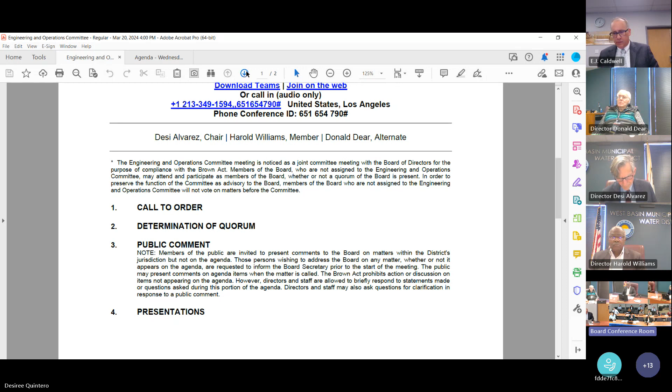The first item is the DCS replacement project. Would our general manager like to introduce that? Yes, thank you very much, Mr. Chairman. On the eve of March Madness, our engineering and operations team has brought their A game for these presentations. As mentioned, the first is item 6A, the DCS replacement project and the owner agent RFP. For this presentation, we have John Benner, our engineer 2.

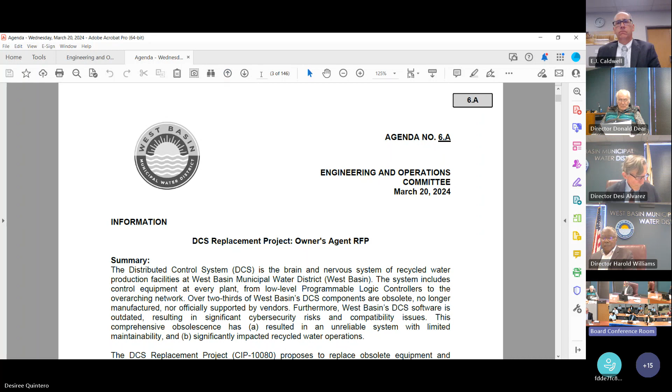Thanks, EJ. Good afternoon, Chairman, members of the board. I'm here today to present information item 6A on the distributed control system replacement project. This item begins on packet page 3, but we'll be starting today with the presentation on page 10. In this information item, we'll be discussing staff's intention to acquire an owner's agent, why it's necessary, and what their scope of work will entail. Next slide, please.

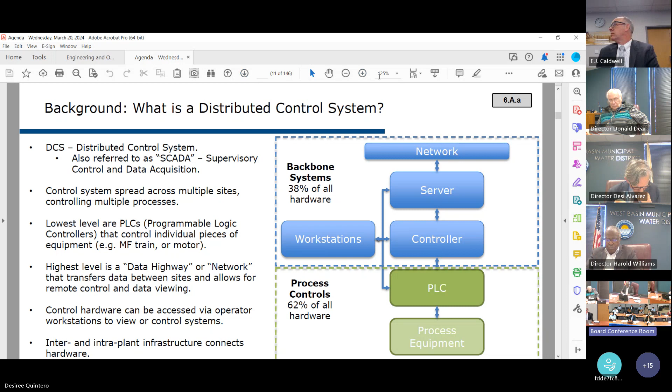First, I'd like to give a brief recap of our DCS system. As I mentioned last month in the project review, our distributed control system is effectively both the brain and nervous system of our recycled water production system. It controls every aspect of production, from the valves that allow the influent from Hyperion to the pumps that send treated water to our customers. At West Basin, we've split our system into the DCS system, with the backbone providing overall control and system management, and process controls such as PLCs managing individual components in the field. In terms of actual components, the split between process controls and backbone systems is roughly 60-40, although the backbone systems carry a much greater risk. Next one.

As I mentioned last month, approximately two-thirds of all our hardware is obsolete, meaning no longer manufactured or supported, with only limited technical support available in the market, if any. This is a problem when around 30% of that obsolete hardware has the potential to cause a full site shutdown. And since there are very few replacement parts on the market, a shutdown could last months. In the last 6 months, we've experienced 4 major DCS-related issues that have impacted production, and these issues appear to be occurring more and more frequently. We're also having issues integrating new systems, such as the JNM Phase 2 project, and these outdated systems present a significant cybersecurity risk, a threat which is unfortunately becoming more common in our industry. There's also a number of ancillary issues, but the bottom line is that our control system is obsolete, regularly failing, and it seems to be getting worse day by day. Therefore, staff is undertaking this project to replace the backbone system in its entirety, which we estimate will offset approximately 80% of our current risk for around one-third of the cost of full system replacement. Next slide, please.

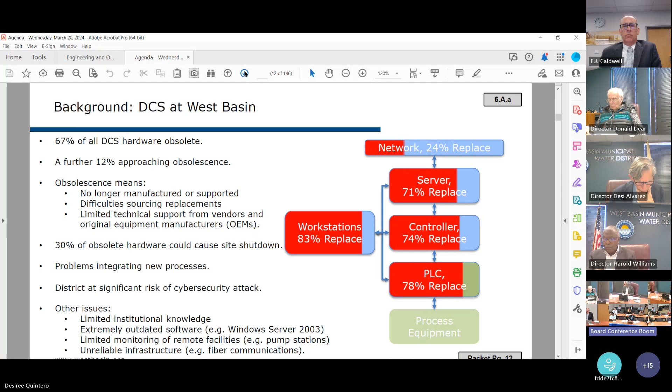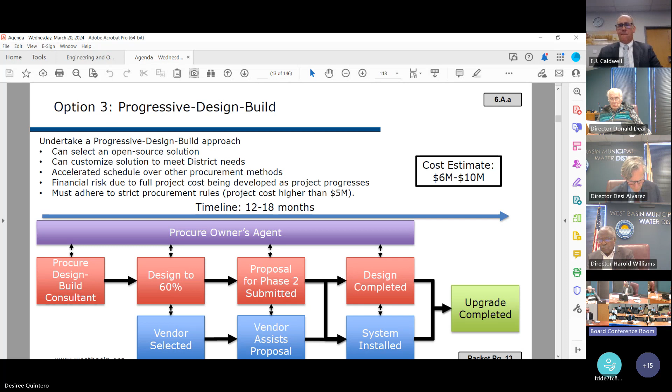As I presented last month, staff is recommending a progressive design build approach. This approach will allow us to assess the available control systems on the market, select the system that will serve the district for decades to come, and install it all within 2 years, while providing a single point of contact throughout to manage both the design and installation. It's estimated that this project will cost up to $10 million and take up to 18 months. One of the biggest risks with a design...

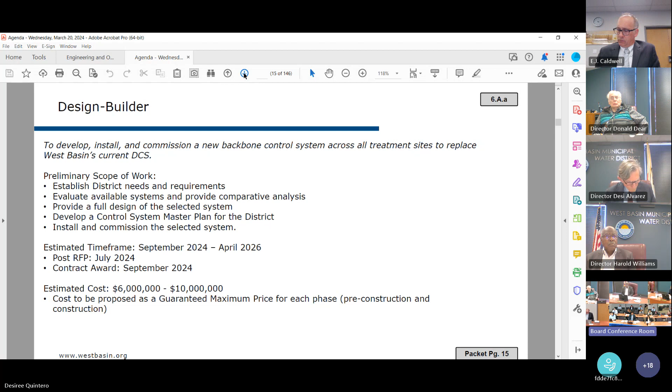Onto the penultimate slide, project finances. This is similar to last month, but as of January 1st, we spent a total of $814,831 on this project, that's since the project's inception in 2019. Just over half of that total was spent on the comprehensive audit.

The backbone refurbishment aims to resolve approximately 80% of our systems issues, leaving us to slowly replace the remaining systems as and when necessary over the next decade.

We have secured $822,743 in refinery funding to date. However, if the total project cost increases to around that $22 million, we would be able to request further refinery funding under our current agreements of up to $3.6 million.

These additional funds will be requested as the project costs become more concrete over the next few months.

In terms of this current fiscal year, we had allocated $1,200,786. However, as of January 1st, we've only spent around $37,000, all of which has been on staff labour.

We intend to use some of that remaining budget to onboard the owner's agent and also to purchase stopgap equipment to try and minimise risks over the next year. But most of the remaining $1.2 million will not be spent before July.

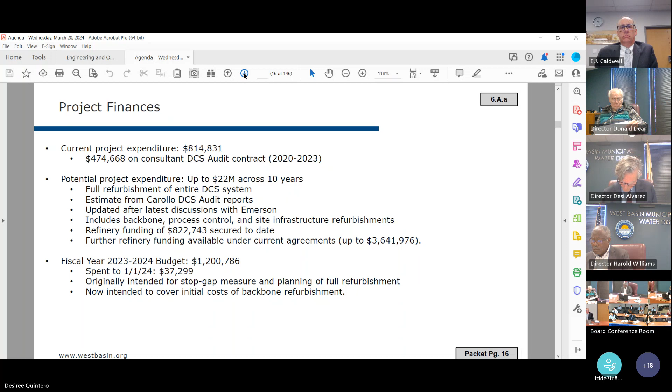And on to the last slide, our next steps. Staff intends to procure and onboard an owner's agent as soon as possible to assist with the procurement of design builder. We hope to have the owner's agent on board by the end of next quarter, with the design builder on board by the end of quarter 3.

Through the end of the year and into early next year, we intend to evaluate and select our preferred system, and then, if the guaranteed maximum price negotiations go well, install that system throughout the rest of 2025, with an intended project completion in early 2026.

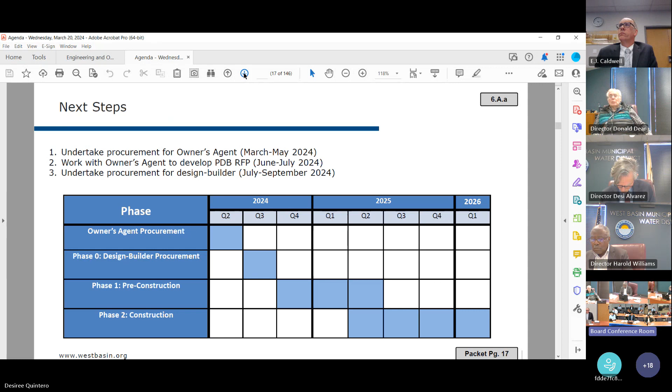Next slide. With that, my presentation is over. I'm happy to answer any questions.

Director Williams, any questions? Yeah, thank you. Yes.

This is a heavy duty project, right? So who, from our agency, is going to be the program manager, for lack of a better term, of the whole thing? You know, your project manager you have, right? Who's going to be the project manager? And who's going to be the manager over the project manager?

We're going to, Director Williams and Directors, have an all hands on deck approach for this particular project, because it's going to be led by engineering, and it's going to be led by John here, who has taken the project over for a while now. So he's going to act as project manager, but he's going to be supported by me and others in the engineering department, as well as several folks from the operations department as well. We're really hoping to have the legal expertise and the technical expertise that John talked about throughout the process, and we're confident that with the onboarding of the owner's agent, we're going to be able to have the right people see this project through. So program manager wise, it's going to be me and others in West Basin's leadership.

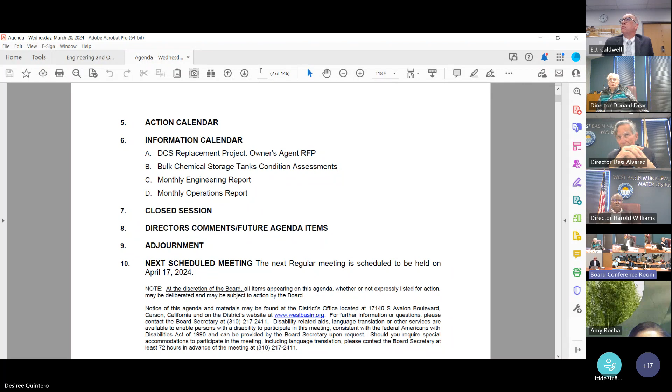It is something we considered. The consideration was that in order to save costs, we're going to need the owner's agent for the entire project, to be available for the entire project, to retain that information and that knowledge throughout. The idea was that if we have a separate construction manager, there'll be a point during construction where they're performing the same role, both of them reviewing and responding to RFIs and submittals. And so we're almost paying twice for some services.

May I add? We don't... okay, go ahead.

Director, in putting out the RFP for the owner's agents, we do give points for small business, local business, hoping that encourages not only the prime to be a small business but also a sub potentially being a small business. You just made the argument for efficiency, and bringing in a sub is not necessarily an efficient concept.

It seems like it would be better to split that out at CM and really target it. You'd have a much greater potential of people responding, and more specialized people saying 'I have that special expertise' without bringing in the baggage of a 5,000 employee firm. So it'd be much more responsive to the district's needs—two contracts, one for the CM and one for the owner's CM agent.

Issued at a later date, as you traditionally do at the time you're awarding construction. So when that design build RFP is really ready to go, you put it out and understand what you're going to get back at that time. Either you go back to the owner's agent and work out something, or they do the CM work if that's appropriate. And if we have a really good owner's agent, that agent's advice would be very beneficial in finding that.

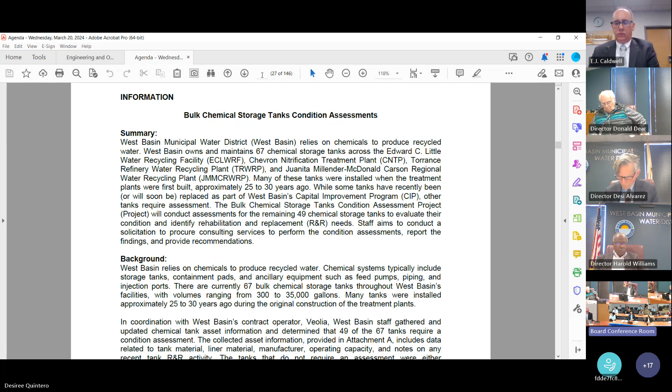So please follow me along to packet page 34. I will walk through the data that we have collected on these chemical bulk storage tanks, the preliminary prioritization that has been determined to perform an assessment, information we have gathered from other agencies regarding their bulk chemical storage maintenance activities, and the next steps for this project.

So on packet page 35, before we could begin scheduling a condition assessment for the chemical storage tanks, we worked with our contract operator to update our asset management information for all the bulk chemical storage tanks located at each of our facilities. That includes ECL, Chevron Nitrification Treatment Plant, Torrance Refinery, and the Carson Regional Water Recycling Plant.

This table shows the amount of data that we had to collect and verify, which included the tank manufacturer, the tank material, the liner material, and operating capacities. We had to assemble a significant amount of information for a more holistic understanding of when these tanks should be replaced. This exercise allowed our staff to identify if a tank is no longer in use, decommissioned, removed, or will be removed via a separate existing CIP project.

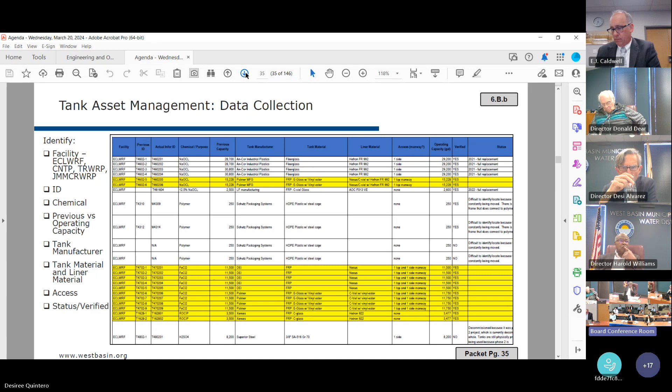On the next packet page 36, the table above shows that there are 67 bulk chemical storage tanks located across all of our facilities. Based on the information we collected, there are 49 tanks that require an assessment, with a correction that the Carson plant will actually need an assessment for 4 tanks instead of 6. The table below shows an idea of the varying sizes of each of these tanks.

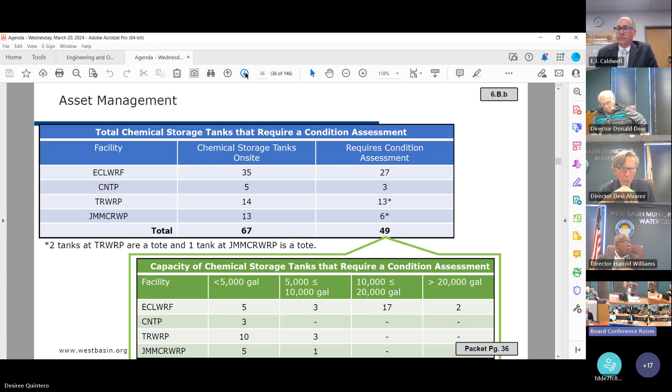Moving along to the next page, on this page and the next 3 pages, you'll see a visual representation of the prioritization of the bulk chemical storage tanks at each of the facilities. The highlighted green, yellow, and red show whether a temporary bypass is needed, or a shutdown is needed, to perform those condition assessments.

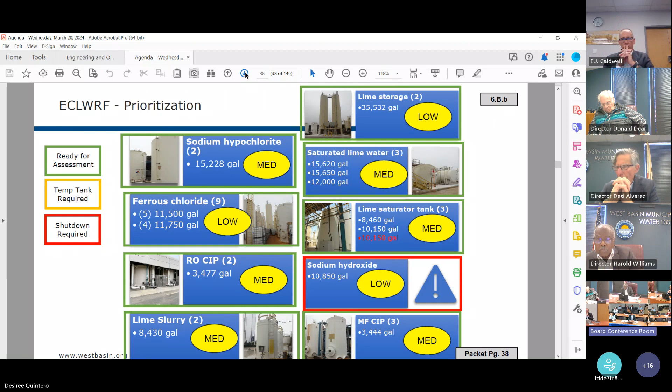You can see here at ECL, there are 27 tanks that need to be assessed. On the next packet page, this is Carson, and I do want to note that the MFCIP will be removed as part of the ongoing CIP project, so there are really only 4 tanks that need to be assessed at Carson's plant.

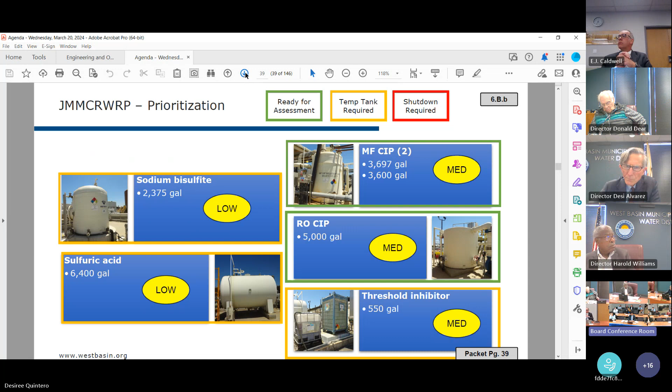The following page shows that at Torrance Refinery, there are 13 tanks that need to be assessed. And lastly, at Chevron Nitrification Treatment Plant, there are 3 tanks remaining that need to be assessed, with the other 2 tanks being currently replaced as part of a separate CIP project.

So on packet page 42, we wanted to perform our own due diligence, and we reached out to other agencies to understand their bulk chemical storage maintenance programs. I do want to note not all of the chemicals stored at each of the facilities, nor all the tank materials used, are on this table. This was simply the information that was provided when we talked to their personnel.

The main takeaway from this information is that most agencies do not have the capability of performing an interior inspection, unless there are specific experts on their staff, so they usually hire industry experts outside to perform those inspections. We also found that the frequency of these inspections varies, as it's up to each agency's discretion.

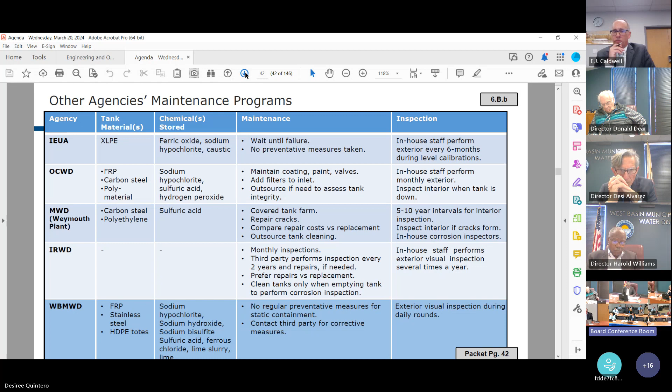On packet page 43, as part of this project, staff plans to hire a consultant to help us perform these assessments and prepare a report that conveys the results and provides recommendations, including tank prioritization based on those findings. Ultimately, this report will help us prioritize R&R of the tanks based on the given recommendations.

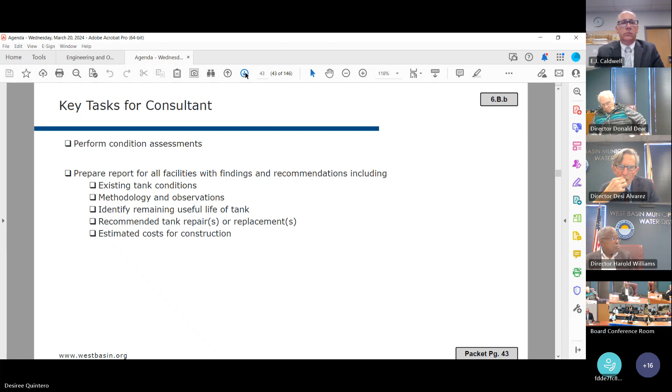And on packet page 44, you'll see that our next steps is to prepare a request for bid, and we will do that via a formal solicitation process. Once we onboard a consultant, we will coordinate with the contract operator to schedule the condition assessments based on ongoing projects and refinery contracts. And that concludes my presentation.

So I'm willing to answer any questions. Alright, thank you, Director Williams. No, thank you. Director Dear, Director Gray.

Okay, so what's the timing on this? So we're hoping to go out for bid next month, and then once we are able to onboard consultants, we anticipate it to be around 6 months to perform all of the assessments, but that's something we have to discuss with them.

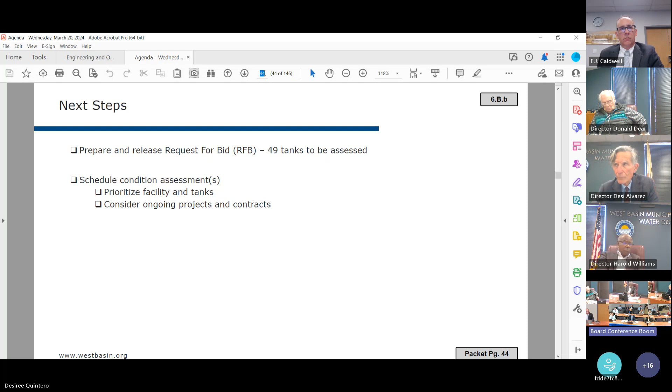If you go back to the slide that has the summary of all the tanks. Yeah. So they're gonna evaluate all 49 tanks. 47, but yes. So by each facility, ideally, they would go through it.

So the determination of high priority, medium priority, and low priority, what does that really mean? The first time I saw it, I thought, well, this is the highest priority in terms of needing an assessment, because we already know it's in bad condition. Is that the case? That is the case. Those are based off of visual inspections performed by the contract operator.

So if we've made that determination, why can't we do this? It seems like we have the ability to assess the condition of the tanks. Why can't we just finish doing that job with the individuals that are already making this preliminary assessment and have them do the additional work? Yeah, that's a good question.

I think the main thing to take away from these visual inspections is that the condition of a tank can look different than what's on the interior. So with an interior condition assessment, we get a better idea of whether the severity of these priorities are correct. If something on the outside doesn't look like much, it's deemed a low priority. I think the intent is with an interior inspection, we can go in and see that there's actually more deterioration occurring on the inside, whether that be cracks or material coming off, and that's what would change the priority level, using that knowledge as opposed to what we don't see from the outside.

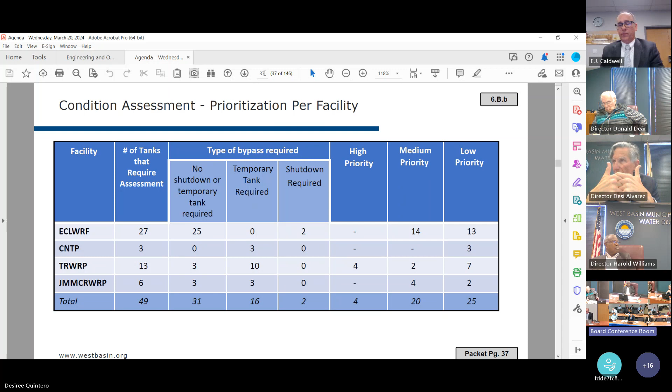At the end of the day, you're saying we've looked at the tanks, or whatever, from the exterior, but we haven't seen the interior. In most places I've worked with, my operations staff would be doing it. The operators would be familiar with inside and outside conditions and come back and report what's happening. It doesn't seem like that's happened here at all. The inside portion hasn't been done, so our operators have not delivered on that end.

Now we're at a situation where we looked at things on the outside, we're not comfortable knowing everything, and we're going to bring somebody else to look at the inside. They'll need the operators to assist them in doing that. Then we're probably going to need to empty out some tanks and make some modifications to the operating process. Somebody has to go see things inside.

We worked hand in hand with our contract operator to get to this point. They provided us with all the information they have - their rounds, their visuals, their ASP information. They dug into their program. They've helped us get to this point.

We've talked to other agencies too, because we were wondering about that. We started talking to other agencies about what they do. I think there's only one agency that said their own operators do the inside inspections. Most everybody hired folks from the outside to come in. I think Metropolitan was the only one that had operators that would put the tank down and go in and do the inspections themselves. But you can see from the table we have over there, almost everybody we talked to hired outside folks periodically to do it.

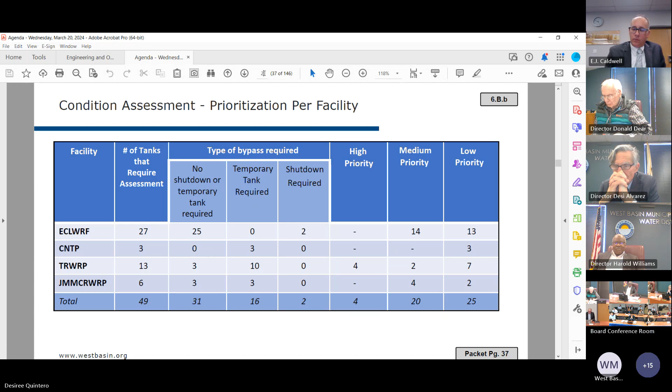Very good. That's it. All right, if there's no other comments from Director Dear or Director Gray, then we'll move on to the monthly engineering.

Yes, thank you very much, Mr. Chairman. As always, we have an entire team here to present on the programs and projects we're all working on. I will hand it off to Veronica Gouveia, our engineer supervisor, who will kick this presentation off. Thank you, EJ. Good afternoon, Chairman Alvarez, members of the committee.

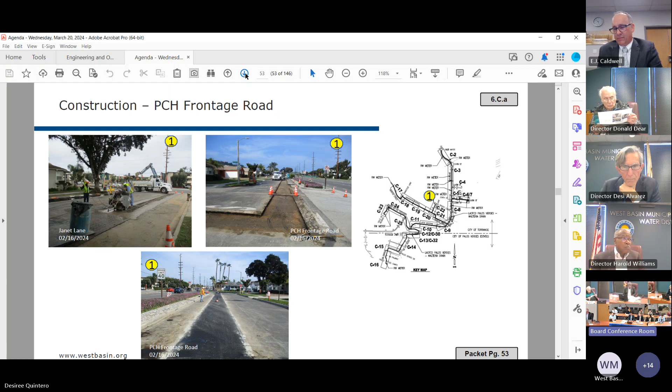On this page, we are looking at the frontage road right behind PCH. The contractor has been working on several segments of the pipeline - they have about 3 crews working. These photos are for the street right along PCH. Next page, please. Again, this is the street running parallel behind it - they're in the process of completing this entire trench, so they're on their way out getting all those laterals completed. Next page.

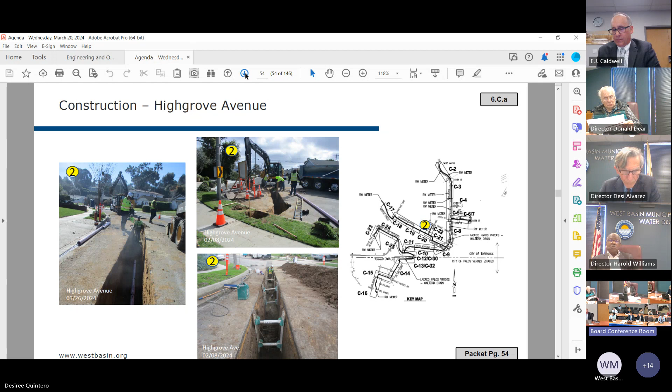Again, more photos on Highgrove Avenue. There was a lot of work happening in that location. There is a school at the end of Grove street, so we have to work around the school schedule, rain schedule, and other limitations there. Next page.

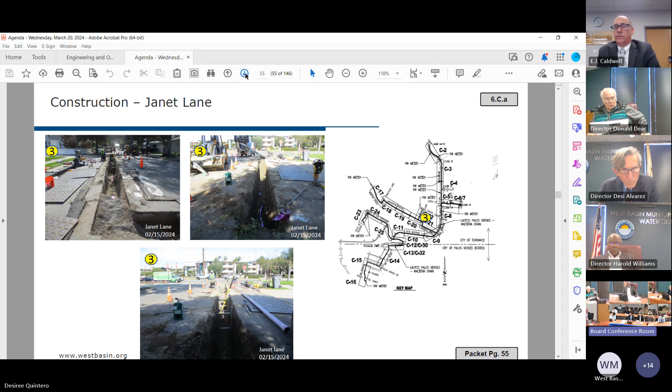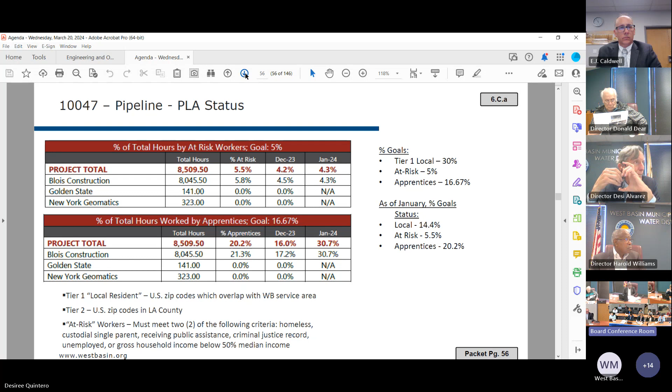Again, these are just basically a totalization of the local residents by tier and division.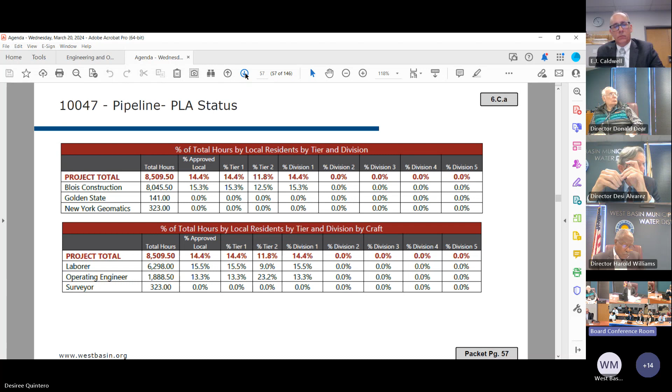Pump station, so on this one, the notice to proceed was issued on February 6, 2024, and we had a pre-construction meeting in February 20. As part of the PLA, we went through a meeting process in which contractors, subcontractors, and unions were present, and basically the work effort that is being produced is being announced, and unions are basically claiming or not the particular craft that is being announced during that time.

So that meeting took place on February 8, 2024. And right now, based on the completion from the notice to proceed, which is 285 calendar days from the NTP, we're expecting to be complete on November 17, 2024.

The next page is just... Where was the meeting held? The meeting was done virtually, through Teams.

Virtual, yeah. And basically we noticed that it gives a lot of opportunity for a lot of those unions to be able to attend while they're also traveling to another location. So it's been successful so far.

You're welcome. This is just a summary of the budget that you have seen in the past that has also, and that concludes this particular presentation. I pass it on to the next person.

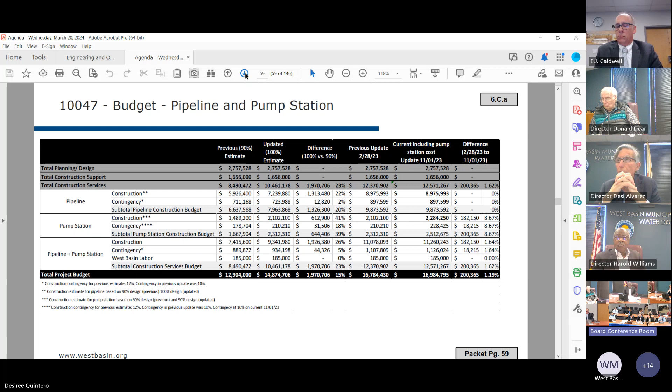That will be Orlando Rodriguez. He will give us an update on the Nash Street lateral project. Orlando. Good afternoon, sir. Before you start, I have some questions on this one, so it might be good to just bring them up. Can we go back to page 52?

If I'm reading this correctly, the pipeline construction should be done in basically another 17 days. No, well, there is still a lot of work that needs to be happening. For example, the Montana Avenue, it's a road that is still closed.

Well, conceptually, the notice of completion should be March 22nd, 2024. There is more than 3 weeks of rain that has been achieved. We have 5 rain days included in our bid package, so we need to assess those additional days.

And also we need to assess whether there was a delay that was created also by the release of the permit from the city of Torrance. The permit from the contractor went in on July 21st, and it wasn't released by the city until September 28th. So we're assessing whether there was some kind of delay there by the city or what kind of impact that was. So those are two issues.

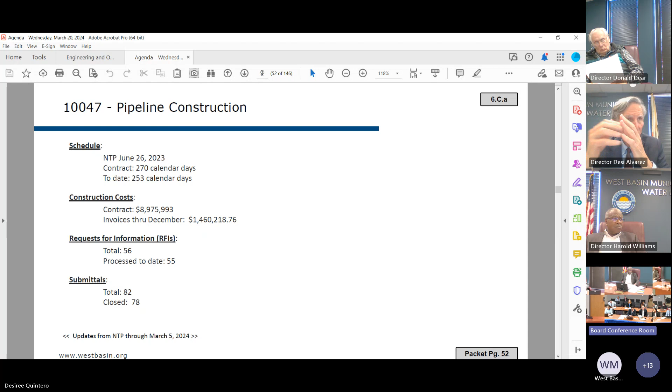Okay, and then on Montana Avenue, I guess that's the one you have the slide on. So why do we need to wait for the city of Torrance? Are we going to change the design, redesign it, or why can't we just ask the city of Torrance to allow us to build there, unless we're expecting to have to redesign or reroute?

Yeah, they have closed the road to all public, including ourselves. So that's one of the problems, that they don't know how stable or unstable the slope is. They're probably still getting that information in order to determine whether it's safe for someone to walk in or drive through. So we're hoping that once they get this report, we can meet and discuss parameters, or maybe be able to do the work while the slope gets repaired. Again, we're working with them, we meet weekly, and we keep asking those questions, hoping we can get a resolution so we don't get an impact because of that closure.

So are we looking at a situation where you finish the pipeline everywhere but one gap? It will be, I don't know yet. So that's what we're trying to do: one, get as close as we can; two, maybe work with the city to have them allow us to come in. But I think the city needs to have some understanding of what happened on that slope, because it was raining, they couldn't really point out how it happened. So they're basically trying to make that assessment.

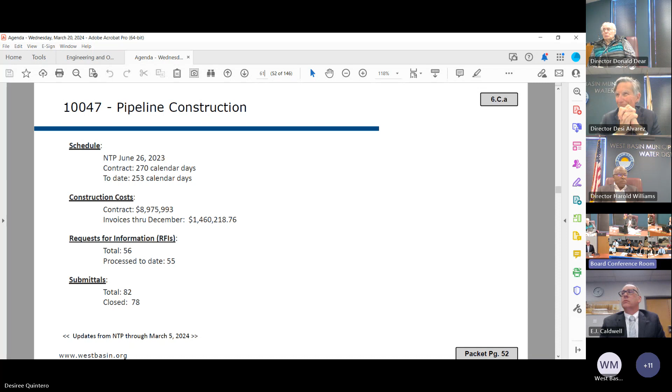This is the Nash Street lateral project. I'm sure we're aware of it now. It's a new 6-inch lateral being fully funded by the developer in this area for the Nash Street extension project by the city of El Segundo. And on the right there is just a rendering of the new Chargers facility.

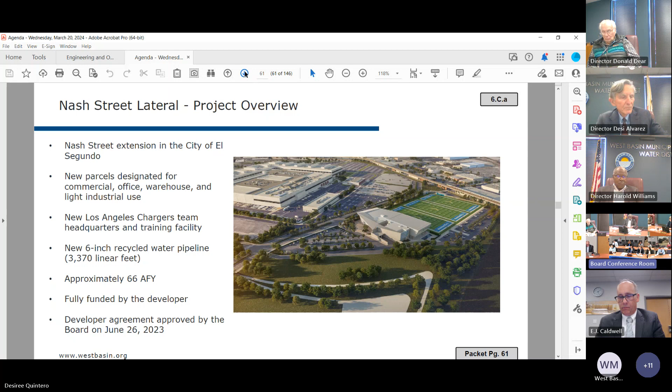Next slide, please. Just the current progress right now: we did request the tie-in at El Segundo Boulevard at the 42-inch main. That is now complete, meaning they made the connection, installed the gate valve at that location, backfilled, and done a pavement restoration.

So that's set. Furthermore, we have done a hydrostatic pressure testing along the main lateral. That's complete as well, so that's one of our requirements.

Then the final connection at El Segundo Boulevard, being that where the gate valve is to the main lateral coming in, kind of like just past that bend there, we connected that. So now we're happy to say that that system is looped.

But it is offline, pending some further inspections, not only by our staff, but also by DPH, Department of Public Health, before we turn that on. So it is fully connected, but not online just yet.

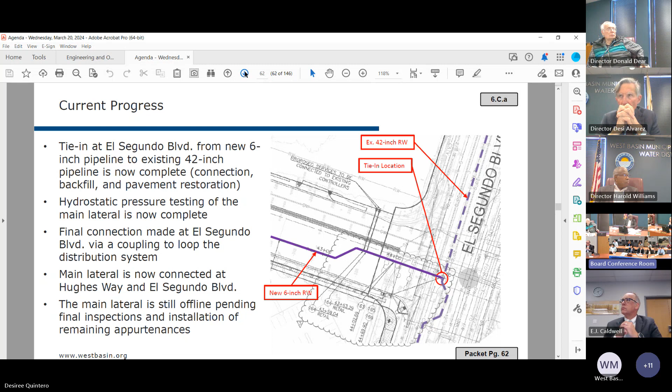Next slide, please. But if I go out there, the trench is full and the paving is done. Yes, for our lateral. I know they're doing other utilities there, so you might see construction going on, but for our work, that is complete.

And that area is particularly interesting because if you've driven out there, it's concrete. Once you get out of that intersection it's asphalt and looks like patchwork. But they fully restored that concrete section that they opened up. So that is done, and here are just some pictures of the current progress there.

Next steps for this are to continue the installation of service laterals for all the parcels that will be serviced, followed by inspection by the Department of Public Health and West Basin staff. Once that inspection is complete and approval is given, they will install the service meters and meter boxes, which also have to be approved by the City of El Segundo water department.

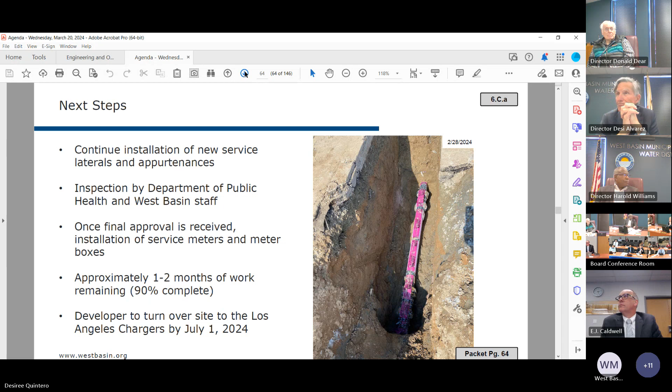Next up is Kevin Cullen for an update on the Phase 2 expansion project.

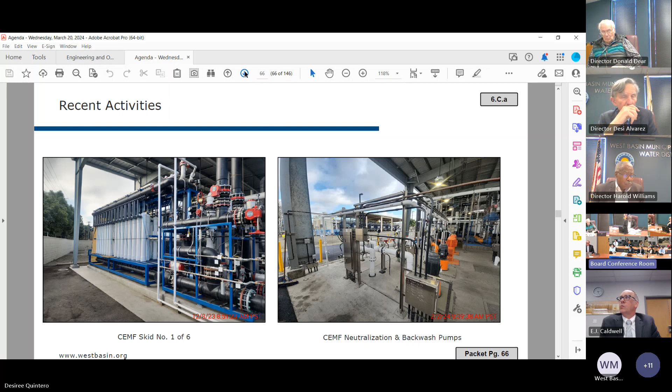Some of the more recent activities, as John mentioned, we did have one DCS failure out at the JMM site. This was a failure of the Ovation controllers. I wanted to highlight this because it was a pretty impressive staff effort on our end to locate some of those hard-to-find parts across the country. We were able to find them, procure them, get them installed, and work with Emerson to get it online as quickly as possible, and we did all of that in a matter of 2 weeks. That was a great team effort.

During that time, we did impede the progress of the contractor's ability to upload their tags to the DCS system. However, as of the 8th, they were back available and ready to go, so the ball's back in their court. The middle picture there is an image of the HMI screen showing what some of the controls look like, at the local PLC, which is PLC 99B. On the right-hand side is one of the flow meters coming off the CEMF skid.

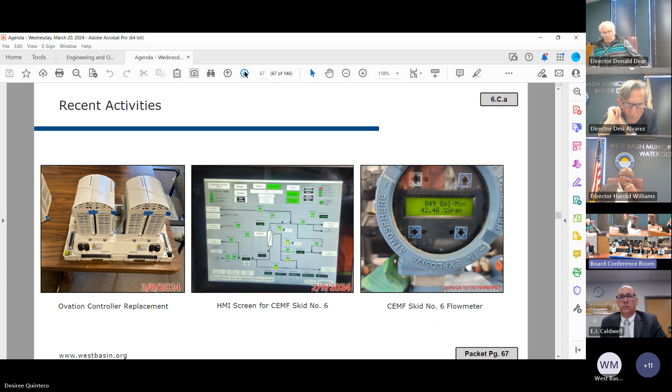I wanted to highlight this because we have been sending flows to the refinery, and we're seeing about 850 GPM out of each skid. At any time, the most flow we've been pushing out of the system is just north of 4,000 GPM. Great to see.

This slide speaks to the construction status. Before I touch on this, I also want to highlight that we had 2 presentations in the past couple weeks at pretty big conferences. Last week was the Water Reuse Symposium in Denver, where we did a poster presentation jointly with our design engineer. I thought it was well received, with a lot of interest from conference attendees. The week prior, we had a presentation done by Hazen and Sawyer, a more technical presentation on the membranes themselves and the improved membrane technology. From what I heard, that presentation was also well received and had over 100 attendees listening in. That was the Membrane Technology Conference in Palm Beach.

Question: how many people from our staff attended?

Orlando and I both attended the Water Reuse Symposium. You should say that, thank you.

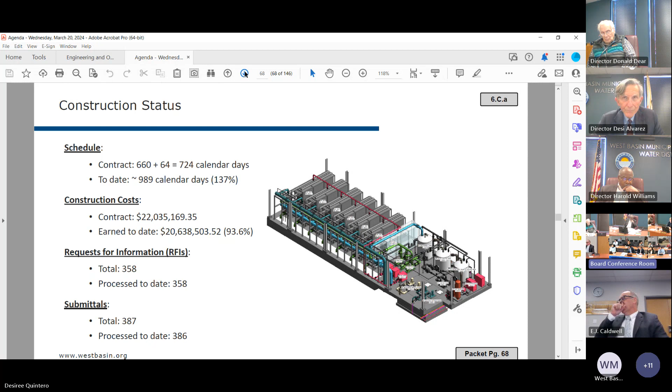As far as construction status, we are a bit behind schedule, I guess more than a bit, but nonetheless we're continuing to push forward as urgently as possible. To date, about 989 days have elapsed, which is about 137% of the original schedule. In terms of cost, the contractors have earned about 94% of their contracted value, and in terms of RFIs and submittals, we're all caught up.

In terms of the PLA and the workforce coming from the local service area, the numbers remain in good standing. Now that we're far along in the commissioning phase, there's not much craft work on site, so I don't foresee these numbers changing much. We're at approved local percentage about 33%, at-risk workers 6.3%, and a solid apprenticeship turnout at 22%.

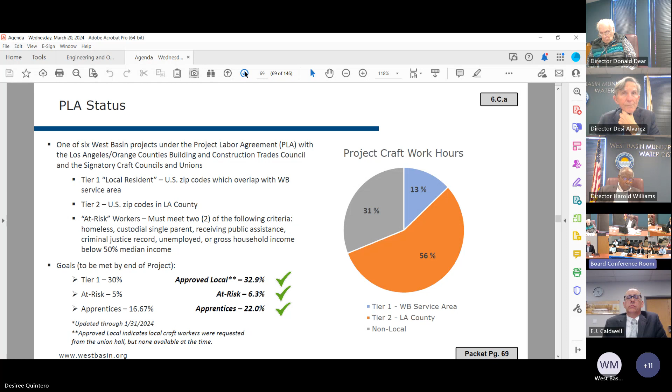The progress has been slow, but nonetheless we're pushing forward. I'm hopeful that we can start that 30-day test mid to late April based on their latest updates, with an ultimate completion date by the end of May.

That remains the target. Kevin, I think you said everything is up and running, and we went through all the testing. So why the delay in the acceptance test? Why not just proceed with that immediately?

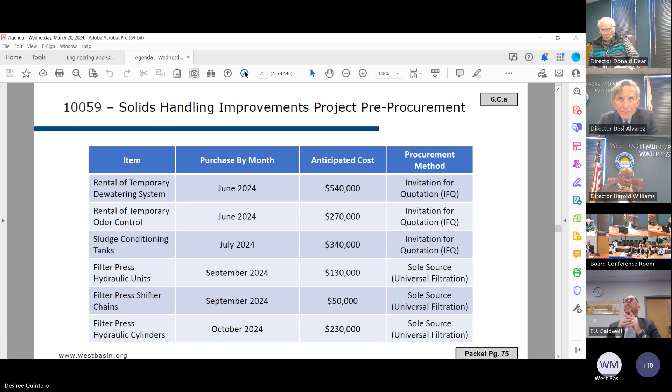Staff's next steps will be to post those IFQs for the temporary dewatering system, the odor control, and the 2 steel sludge conditioning tanks. We'll also prepare and post the construction management RFP to ensure that the CM is onboarded and able to provide a constructability assessment in the summer for the 90% design.

In May, staff intends to return with the recommended awards for all 3 procurements and the CM contract. And the following month, we hope to present the 90% design to this committee if it's ready, and request an approval to post the RFB for construction. That ends the solids handling.

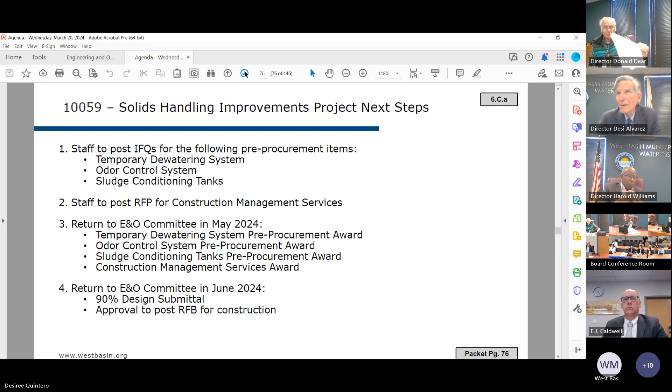At the end of the slide deck, there's typical information about all the rest of the projects that are on our CIP schedule. But that pretty much concludes the update on the engineering report. Happy to entertain any questions.

They're leaving now. Yeah, I don't know if you had any questions. I don't have any questions.

My only comment is on the last item. I've raised a lot of concerns in the past, and I still have those concerns. I'm concerned about how fast it's moving along versus where we are financing it and other background issues, and that will determine an ultimate need for this or not. There's a lot of money that we're potentially prepared to spend and we don't necessarily have it. So moving along at that pace, bringing back procurement material in May, making a commitment to spend money, I'm very concerned.

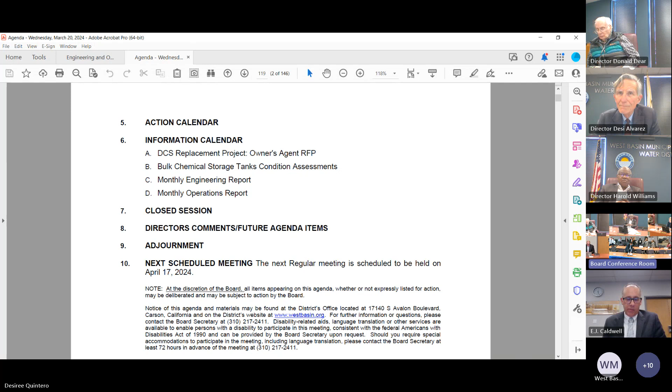Okay, so we will go on to the monthly operation report. Yes, thank you very much, Mr. Chairman. Similar to our engineer report, we do have the monthly operations report.

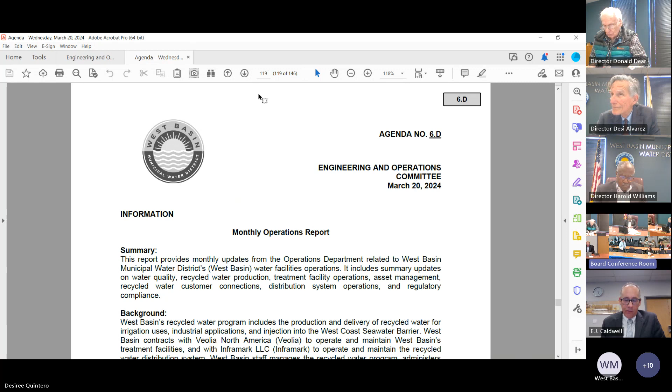It does begin on packet page 119, and this again will be a team effort. We do have Uzi Daniel, the manager of operations, as well as Susanna Lee, our operations supervisor, here to kickstart this presentation. So you want to start this off with? Yeah, I just wanted to mention the issue. I was going to do that at the end. Oh, okay.

Mr. Chairman, it is not included in the monthly operations report, but we do have some activity that's been happening over the last couple of days, and I've asked staff to present that today so we can get that on your radar. It is related to the Torrance Refinery in Torrance, so we'll throw it over to Barca.

Thanks, CJ. A real quick update on recent events regarding the backup potable water supply to our Torrance satellite plant. We have a backflow preventer and a backup potable water supply that feeds into the nitrified and boiler feed systems that in turn supply two types of recycled water to the Torrance Refinery.

We've been reporting on this for quite some time on the backflow preventer and its status. Last week, the backflow preventer failed its annual inspection test, and the LA County Department of Public Health was notified. They basically told us at the time that temporary repairs on the current backflow are no longer a viable option, which is what we've been doing for the last few years.

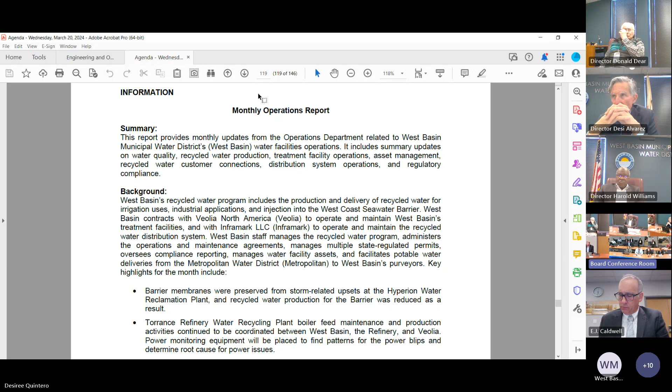Thank you. Good afternoon. At the upper level, I think you'll get a presentation today on a lot of these issues. Things move fast in operations, so I know we'd like to look back, but as you hear, things change every day. We did have another bit of a water quality upset, so we conserved our barriers. We're tending to that now to conserve those membranes. We're back up with some flow there, got our sampling done, and had to work with the regulators as well to make sure we could get our samples in. So that was a good success from our team.

Also, as Mark mentioned, last month we did have quite a large team effort to make sure to get Torrance back online and also get some power monitors installed. We've been having power blips there, so we worked with Edison, the refinery, and everyone to make sure we got instruments installed to try to start looking for those patterns.

Distribution was busy with folks still running into these air valves and working. One of them, unfortunately, was on the brine line, but I'll give credit to the team that was out there — they were able to make sure to block the storm drain, have that leak diverted, so we didn't have to report anything to the storm drain or any kind of threats, and we got that repaired.

Just yesterday, the Regional Water Quality Control Board and DDW came to the plant. I'll say, and Jamie will probably cover this a bit more, they were there from 10 a.m. to 4 p.m. It was quite thorough at the plant. Always good to know the direction — you probably heard some of the direction the LA board is going on anti-deg and some of that stuff. They had people fly down for this inspection from Sacramento. Everything went really well.

A few small follow-up items. Always got to give them something. But it did go well, and I think it allowed us to see the tone and direction of where we're going with recycled water and what some of the thoughts are on that.

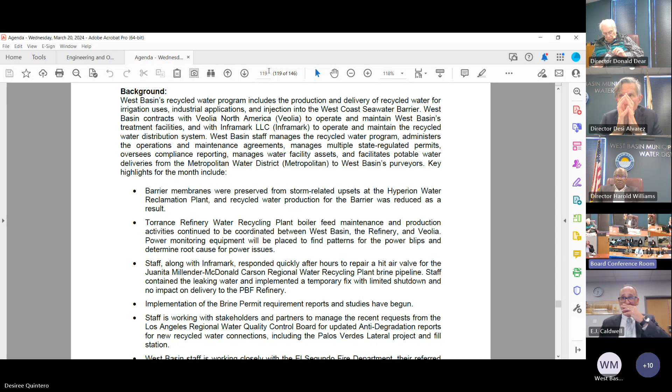Also, finally, two things. The fire panel - we're still working with the fire department and having good discussions so we can get away from that proprietary system and have a general system that we can go out to competitive bids every few years to have monitored.

And then also we've been working on quite a few issues with our purveyors and MWD - I think Frank will update you. Just like us, MWD is looking at a lot of infrastructure improvements. That means a lot of shutdowns, us having to work with purveyors to get emergency interconnections and things, so some of that might make its way even to the board for decisions. But otherwise, if you saw in play some of the teamwork between MWD, purveyors, water companies, DWP - that old ethos of water, people will come together when they need to make sure a community stays in there. So I think in the end we'll have some good stories and nice presentations on that.

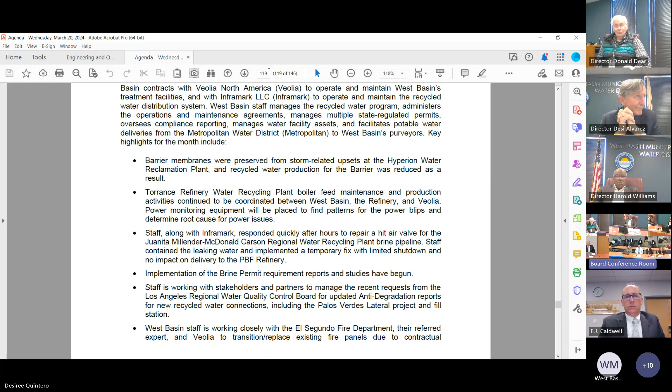As Uzi alluded to, the water quality continues to be an issue and a challenge for operations. Experience coming off from the storm events - they're cleaning up a lot of primaries that have been impacted as they had to bypass those storm influent screens.

So you can see that the influent water quality in February was - the upset you're talking about is because of inflows; they couldn't handle all the flow, so they had to bypass the screen, and that allowed a lot of sediments and dirt through. So it's an I&I problem.

We don't know exactly, but it could be inflow and infiltration associated. Normal flow is 250 MGD, and you got more flow than they can handle in the streams. It's an I&I problem - where's the water coming from? Most likely, we're not aware of any additional incident.

So what they do then is they just bypass the screens completely - one of them, they open up one of them. That was because during the big sewage spill event, we were told they didn't open them and then it started to cause a problem, flooded their whole facility, created the problem. So now they're opting to bypass them, letting the flow go directly into the plant.

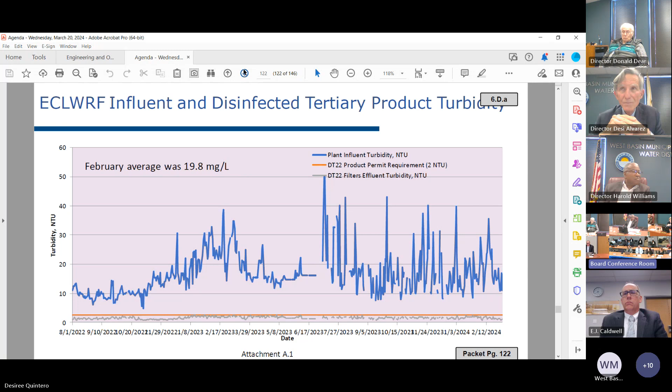So we can go on to the next slide, which generally shows a pattern that we have water quality excursions.

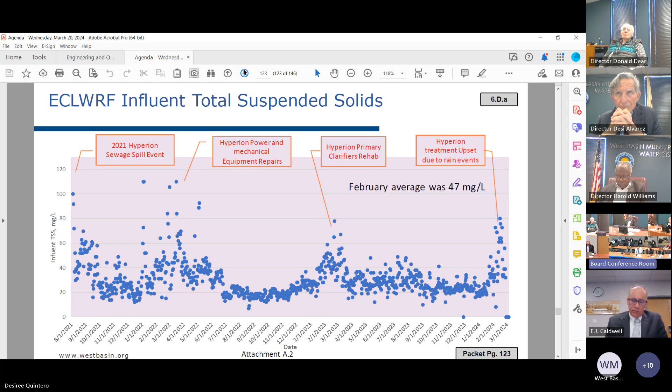Next slide. This is just highlights of some of the maintenance activities. The reason I put down the cartridge filter replacement is that it impacts our operations because we have more solids coming in that affect our MF, which then slows down our operations. Cartridge filters, normally replaced every 3 to 4 months, are currently being replaced every 2 to 3 weeks. That's due partly to water quality, as well as phase 5 membranes that are not in the best condition and are waiting for replacement, so we're having more frequent cartridge filter replacement.

The next few photos show cleaning up and inspecting the gravity thickener, and a lot of resources being spent pinning phase 5 MF membranes waiting on replacement. As we spoke, there was a lot of work that went on during February to get the system back on.

On the membrane, on phase 5, didn't we order a whole bunch of membranes a year or two ago for that? We haven't installed them yet. It was almost 2 years ago that we had to order those - that was phase 4 membranes. Phase 4 membranes have been replaced. These are the tall membranes that we ordered.

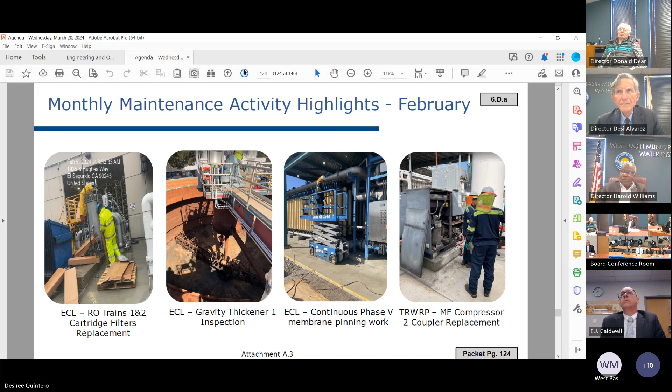Next slide, please. We'll be reviewing the production for February. As you can see, in February we produced below last year's target as well as our budget amount. There are 3 main drivers. Next slide will show you the detail.

We had a lot of rain, so for Title 22, we only produced 59 acre feet versus the 217 acre feet that we targeted. The other 2 big factors: the barrier was down for most of February because of water quality issues and some mechanical equipment issues. And for Torrance, as we've spoken about, we were offline since February 9th and back online February 21st. Those are the big ones that caused us to miss the target, putting us 11% off our current fiscal year targets.

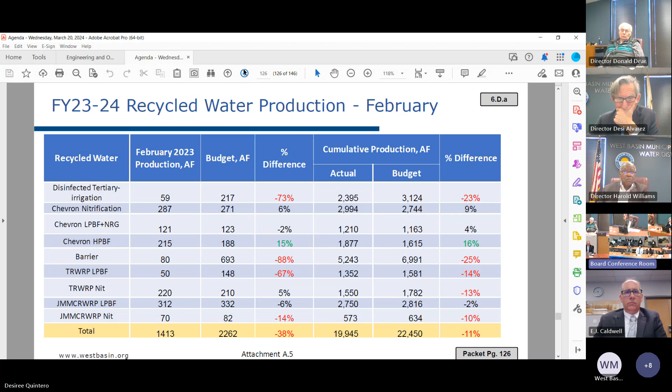The next slide is a comparison to our production in fiscal year 23. As you can see, the barrier is the one that really did not perform well compared to last fiscal year.

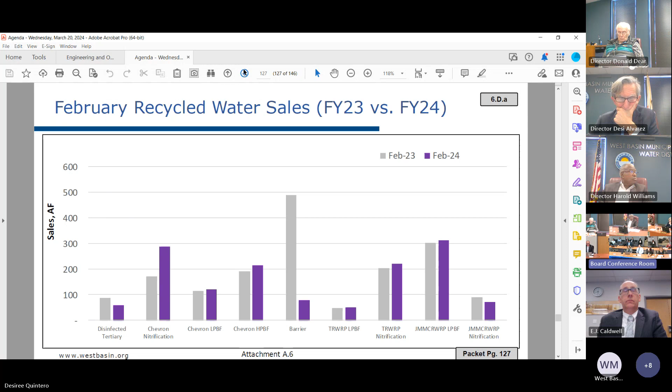Going back to all the activities last month, we had to do a lot of reprogramming of all the failed communication cards to the RO system and the PLC system. We had to wait for CCVs to arrive and replace a lot of the valves and actuators. Once we completed that reprogramming, we originally targeted to be back online on the 15th.

However, the electrical and I&C team decided to put in a UPS to help eliminate some of the power quality issues we saw and bring a bit more reliability. So we pushed back another week before bringing the system back online, and took extra couple of days to make sure our system was stable. We were running on potable water for a few days.

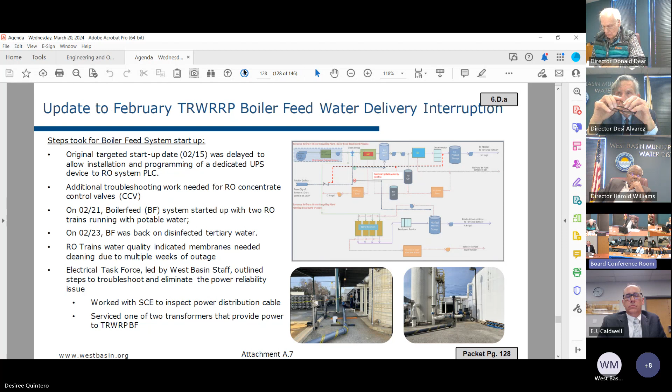Finally on the 23rd, we were back on recycled water. On the same parallel path, the electrical task force was tasked to look at the power quality issues that might have caused the original interruptions. They did a number of investigations into power quality and reliability. We got SCE to come in and look at the distribution cable from the refinery substations to our transformer, and no issue was identified there. We also serviced one of the units, and after all of that, we got the system back online.

The membranes are the next big concern because we were offline for a couple of weeks without being properly flushed. So we've been busy doing a lot of cleanings and trying to balance flows and demands with the length of time needed for cleaning.

Right now for short-term mitigations, since we did see the need for replacements, we're planning to replace all of the stage 3 membranes for the ROs. We've also got our two PCBs back, so now we have 4 RO trains and can do proper cleaning. We will be coming back to the board to replace all of the RO membranes in the coming months.

There are a few other items that the power task force is following up on, including servicing the switchboard as well as the other transformer. And as Lucy mentioned, we put in power quality monitoring devices on the transformer and the boiler feed system to try to identify the cause.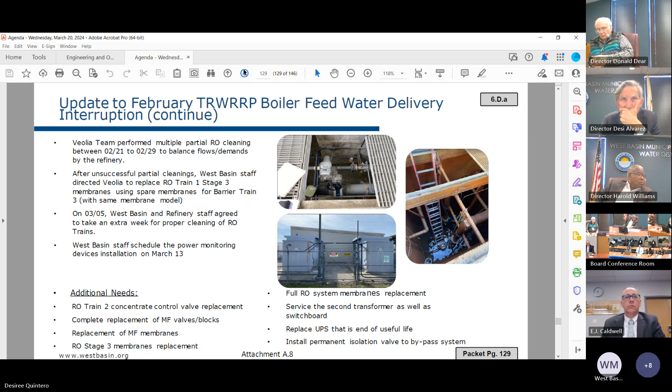Compliance update for February, environmental compliance. February was the month we had our 4th quarter 2023 reports due for both brine permits, Title 22, and barrier, as well as our annual biosolids report. This was the month the new brine permit for ECL officially went into effect. We also had an inspection yesterday, not necessarily related to the brine permit, but overall at ECL, and it went very well.

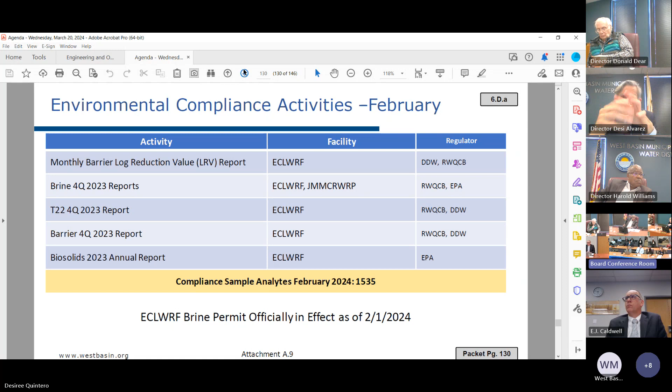Update for solids handling: our two current waste haulers agreed to a 6-month no-cost time extension through the end of the year. The RFP for these services will be submitted at the end of the year. The reason for postponing this is because we may be including dewatering services as well as future hauling projects within the new contract.

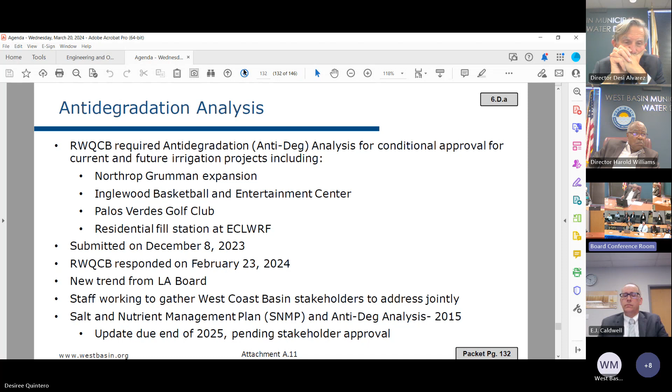The regional board came back and said they would like the following information included: that we need to include the Santa Monica subbasin of the Los Angeles Coastal Plain Basin in our analysis, not just the West Coast Basin, because some of our service area extends within that subbasin. They wanted a summary of how irrigation projects impact groundwater quality and assimilative capacity as determined by the Salt and Nutrient Management Plan of 2015, and a discussion of the salt and nutrient management plan's projections for TDS and chloride. The current SNMP states no assimilative capacity is available for these constituents.

They would like us to address water quality objectives for sulfate and boron, and to address BMPs to reduce impact to the groundwater basin, specifically controlled irrigation to minimize percolation beyond the plant root zone. They also said that future West Basin projects extending beyond the SNMP timeline must be removed until the anti-degradation policy is updated.

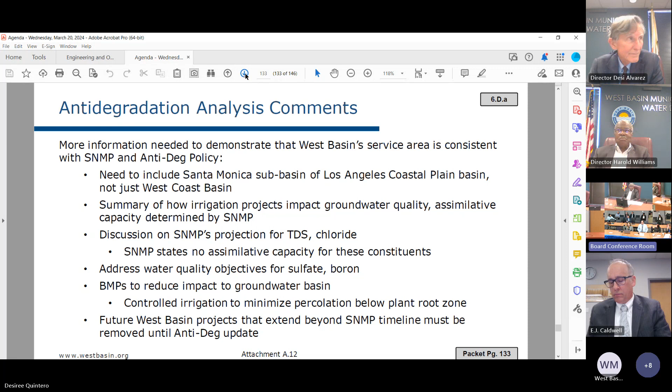As we discussed before, ECL has a proprietary fire control and monitoring system with only one vendor to work on it. In July 2023, the vendor inspected the fire alarm system at ECL and flagged deficiencies. Therefore, El Segundo Fire Department issued West Basin a notice to comply. Veolia and West Basin called the vendor to return and repair the system. The vendor has declined to sign terms and conditions of both Veolia and West Basin's purchase requirements. West Basin's procurement and legal staff did not recommend agreeing to the vendor's terms.

The fire department - what are the vendor's requirements, pulling this whole thing up? They're basically waiving themselves of every and all liability and responsibility, and our legal and everyone's - they take no ownership or responsibility, and even put it back on us. Did they say why? No, it's standard, but they were purchased and we're experiencing difficulty even trying to reach the right person.

So I think it's just they've become such a... basically it's gone through now a new owner, but fundamentally it's the same vendor as before. So what did they agree to before? What did we agree to before? Did we have them sign our indemnity documents? Absolutely, our standard terms.

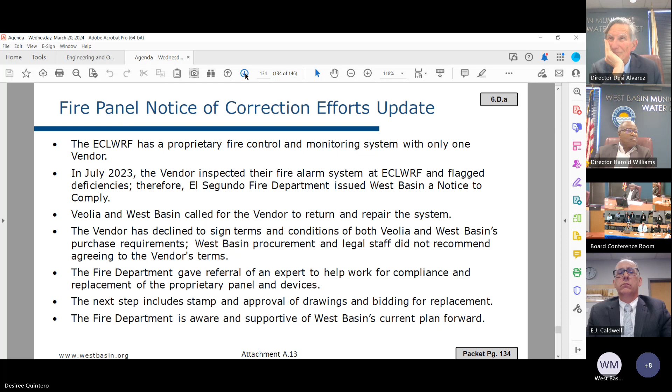Over to Frank. Thank you, Jamie. Good afternoon, directors. Next slide, please. This is our monthly potable water customer service update.

As Lucy mentioned earlier, one of the projects I want to highlight relates to WB8, which serves the city of Lomita. Metropolitan Water District identified a valve serving WB8 as very corroded, and they wanted to get that replaced. They're implementing other work, a second lower feeder relining project, so they want to take advantage of the contractor being out there. They're requesting a 3-day shutdown between April 15th and 17th for that service connection.

That service provides the city of Lomita almost 80% of their potable water supply. As a result, the city is going to utilize a reservoir during the outage, and they're also going to obtain potable water from LADWP as an emergency supply. There have been ongoing meetings with Metropolitan Water District, the city, and DWP. DWP recently requested an agreement between all agencies so they could ensure they receive credit for the water they're going to supply the city of Lomita. We're currently in discussions with agencies to try to determine how we can figure that out.

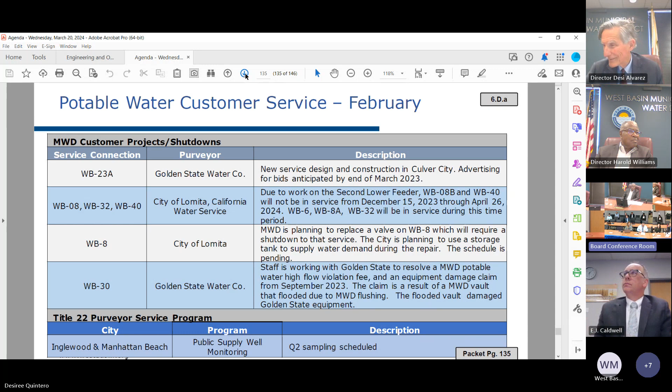Okay, keep going. Move on to the next slide if you like. These are potable water sales for February. The actual demand for February was 4,775 acre feet compared to a budget of 6,433.

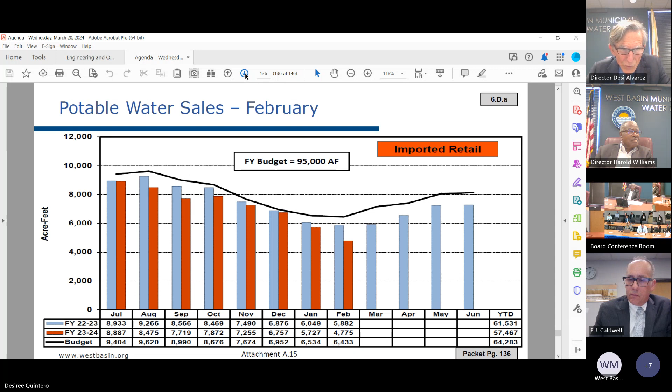This is our recycled water distribution system activities update for last month. We didn't have any leaks in February. However, we did have a leak on a brine line in Carson earlier this month.

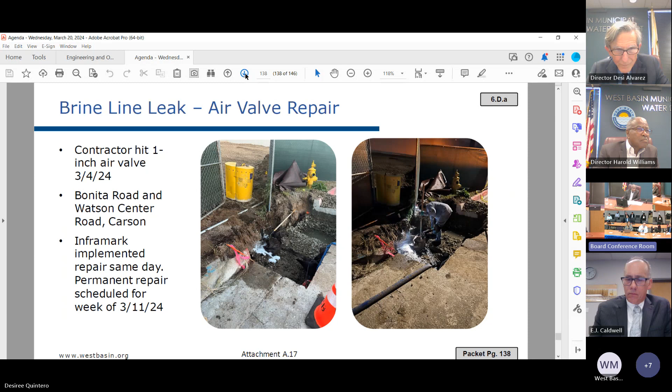This was the result of a contractor that hit a 1-inch air valve on Bonita Road in Watson Center. Inframark was able to respond and isolate the leak immediately. There was no brine water that had gone down; the storm drain was all contained. We also had the contractor put it onto their side, up to their site, instead of going out to the road.

This was not caused by our contractor, but by a private contractor, so we will be charging that contractor for the repair work. This is just a map of the location showing where our line was hit.

We do ask Inframark to follow up with any contractors when they get to USAs and there's a conflict. In this instance, our contractor had called this other contractor to notify them that we wanted to be there because we knew there was a conflict, but the contractor did not notify us.

Which leads me to another item related to some additional work other contractors are implementing. LA County Public Works is working on a large stormwater capture project at Alondra Park, on Manhattan Beach Boulevard just east of Prairie. We have a 42-inch transmission pipeline on Manhattan Beach Boulevard, and the county is going to be constructing very close to our pipeline.

They submitted some shoring plans and let us know last week that some of their shoring is going to be approximately 6 inches away from our pipeline. They're re-looking at their shoring plan to see if they can provide a little more distance, but we will have staff out there once they start excavating to ensure they stay away from our pipeline.

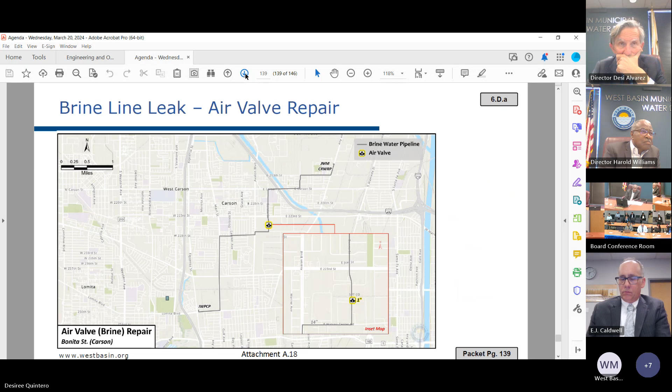This is also an update for a new connection that we're anticipating to our recycled water system, at LA Southwest College. We've been working with them for many years to try to get them connected, but it's been a process over many years of them making modifications to their on-site system. We anticipate they'll be able to connect hopefully by June this year, which would be an additional 60 acre-feet a year of additional recycled water service.

Assuming the regional board allows it - the policy may put this on hold. So tell Southwest College to show up at a regional board meeting and complain.

Working on it. The approval for this one we had from a long time ago - this was approved by Department of Public Health.